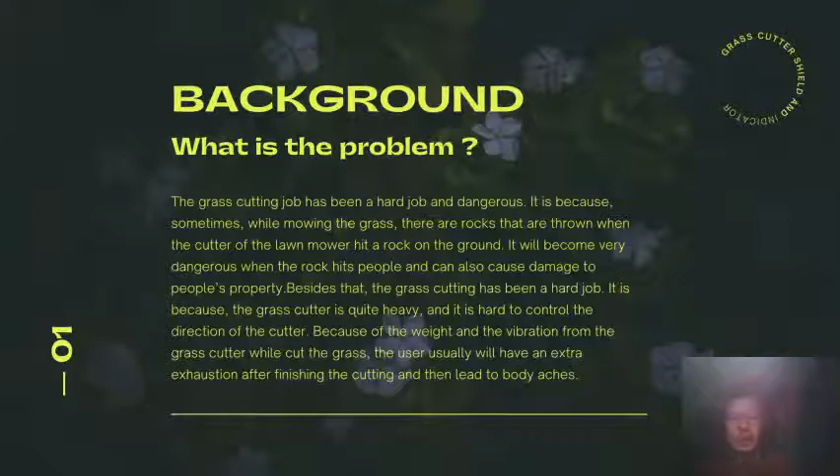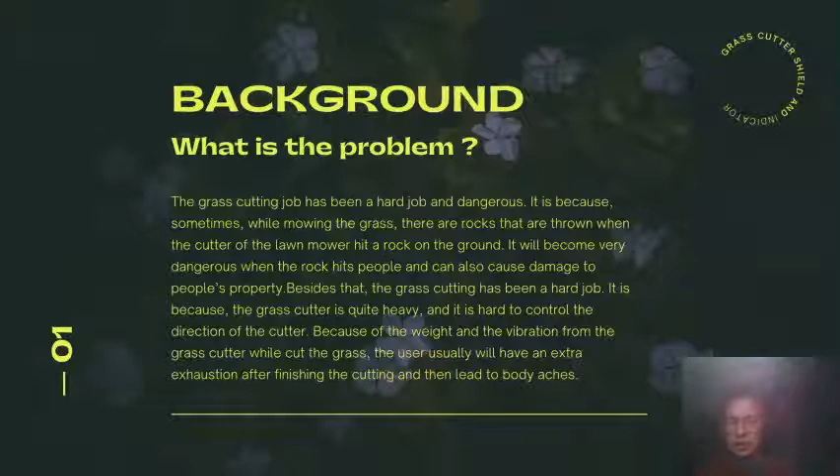Firstly, we want to talk about the background. What is the problem, and why did we create the Grass Cutter Shield? The grass cutter job has been a hard and very dangerous job. Sometimes while mowing grass, rocks are thrown when the cutter of the lawnmower hits a rock on the ground, hitting a person. This becomes very dangerous when the rock hits people and can also cause damage to property such as windows or cars.

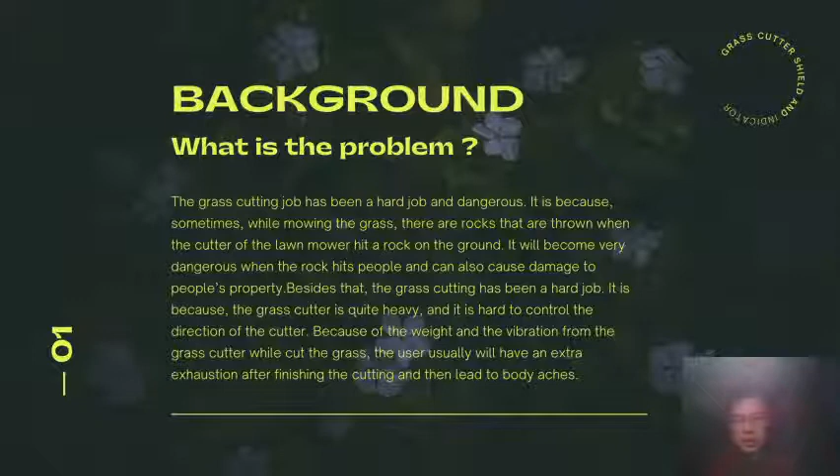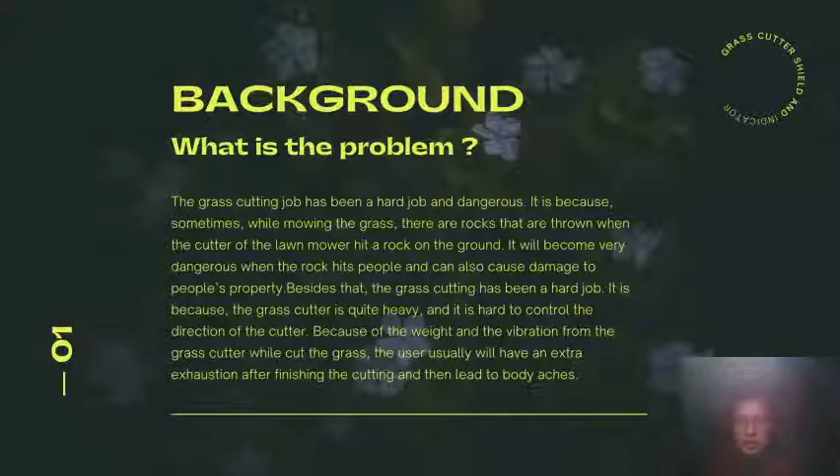Besides that, grass cutting has been a hard job for old people. It is because the grass cutter is quite heavy and it is hard to control the direction of the cutter because of the weight and vibration while cutting the grass. The user usually has extra exhaustion after finishing cutting, leading to body aches.

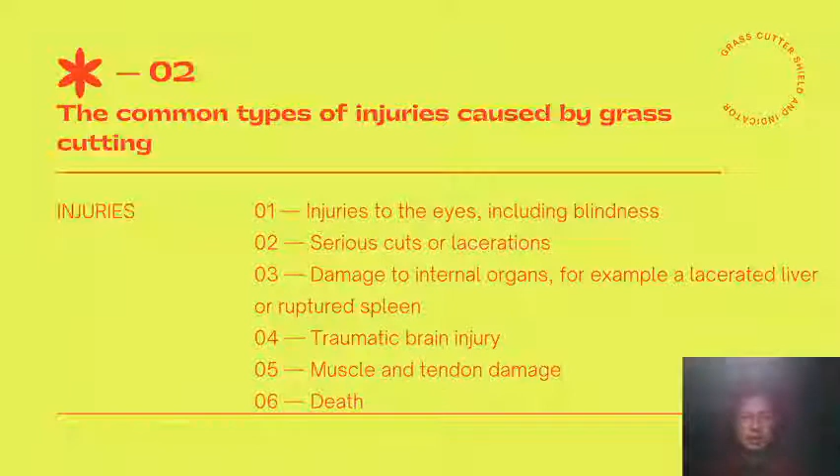Next, what are the common types of injuries caused by grass cutting? People who use the grass cutter often get injuries such as to the eyes, including blindness, and serious cuts and lacerations caused by rocks. There's also damage to internal organs, for example lacerated liver or ruptured spleen, traumatic brain injury, muscle and tendon damage, and lastly it may even cause death.

I created a product called a shield that is used to protect and avoid any chips or rocks that are thrown during the grass cutting process. Meanwhile, the indicator has a wheel and functions as a guide for new users such as youngsters or older people, so anyone can use the grass cutter easily, even with no experience at all. By this invention, anyone can use the grass cutter in safer and easier conditions.

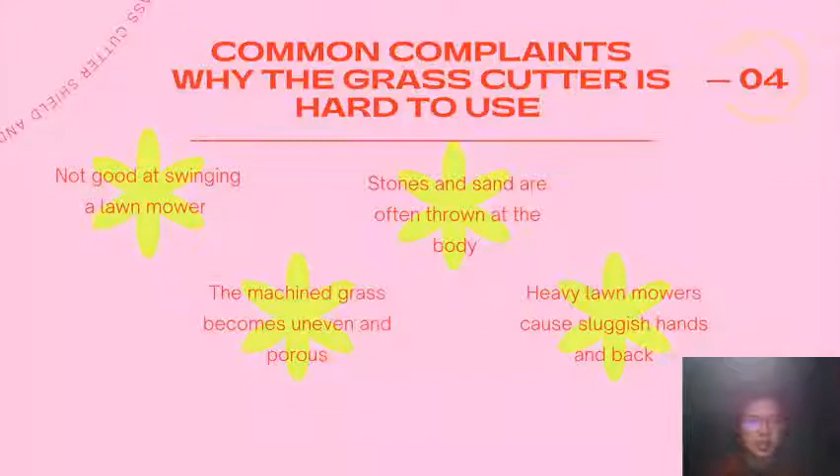The common complaint about why the grass cutter is hard to use - we conducted a survey with a number of people. Their most common complaint is that they are not good at swinging a lawnmower, which is why they avoid using it. The mowed grass becomes uneven and patchy, stones and sand are often thrown at the body, and heavy lawnmowers cause sluggish hands and back pain. This was the most common problem we found.

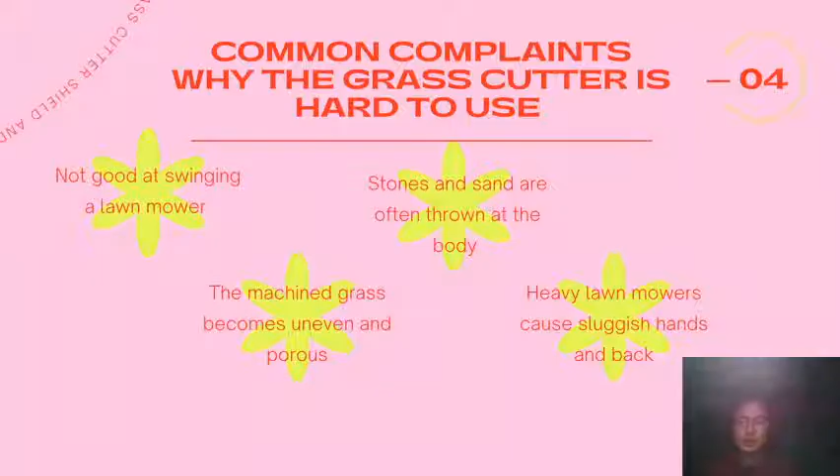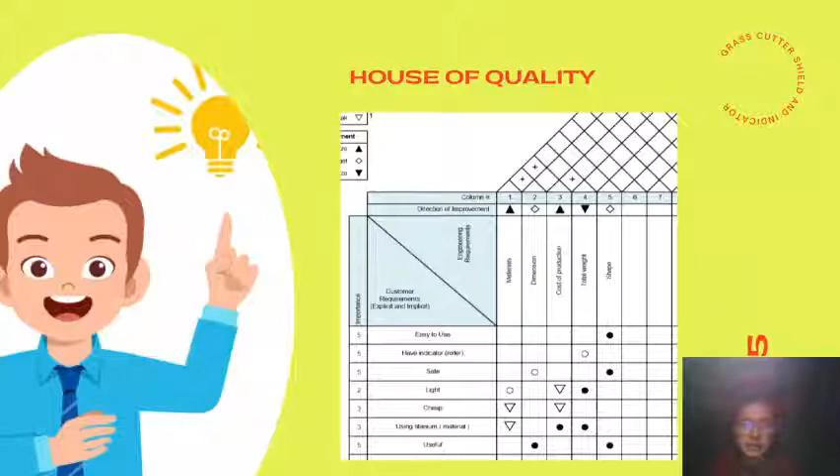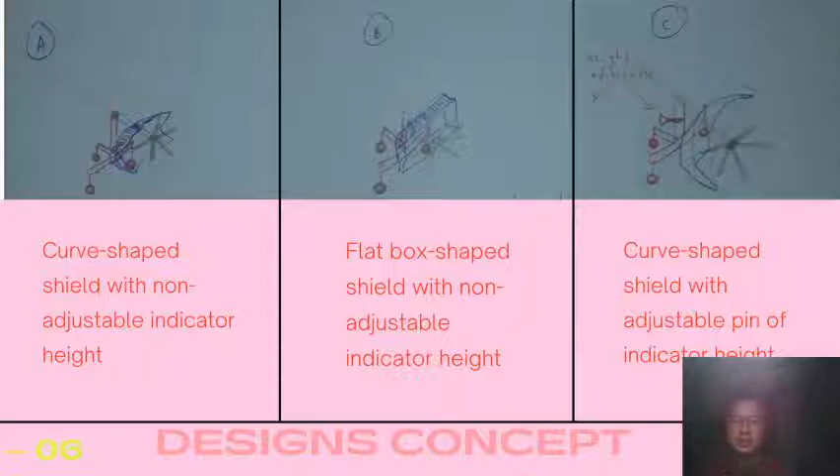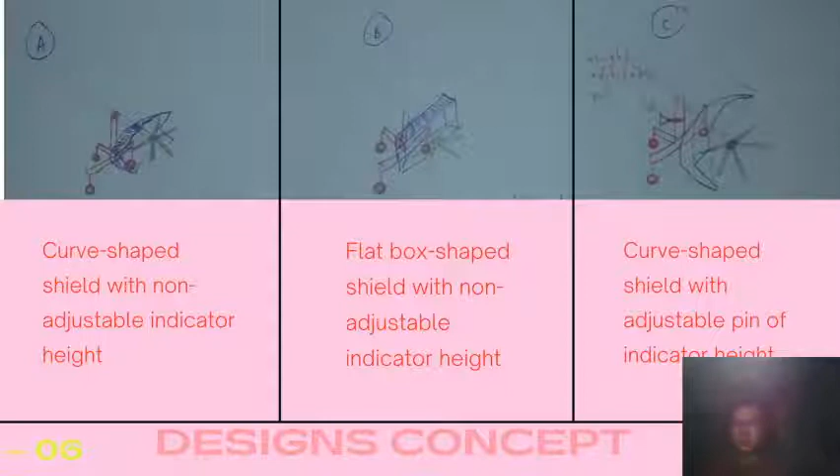Next, the design concept. Before creating the product, we created three designs for the shield. Firstly, a curved shape shield with a non-adjustable indicator height. Next, a flat box shape shield with a non-adjustable indicator height. Lastly, a curved shape shield with an adjustable pin for indicator height. Among these three, I chose design C because it is easy to use, and the curve shape can protect against rocks and sand flying during the grass cutting operation.

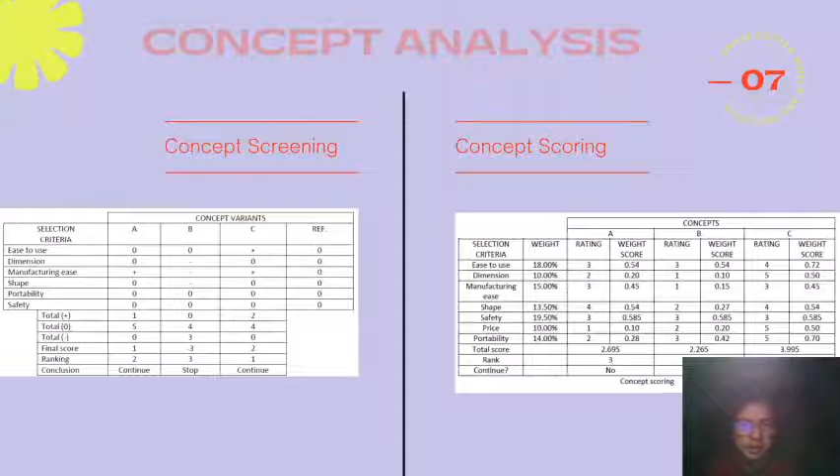Next, we did some concept analysis, separated into concept screening and concept scoring. Through this concept analysis, we could determine which design had the higher score, allowing us to proceed to the next steps.

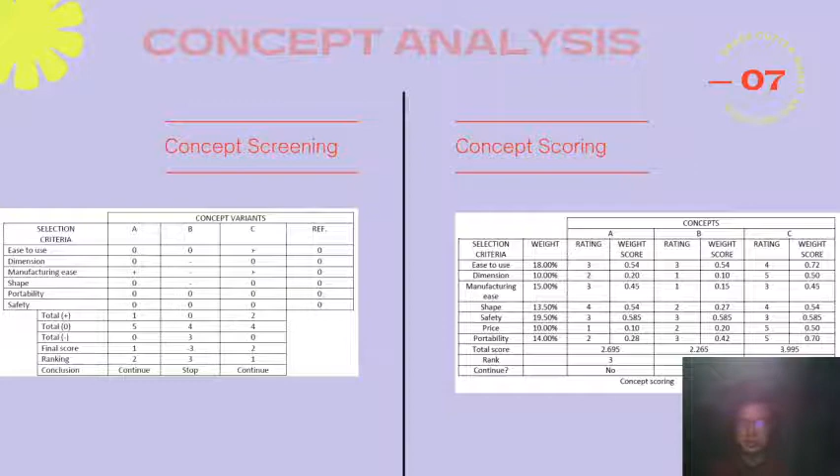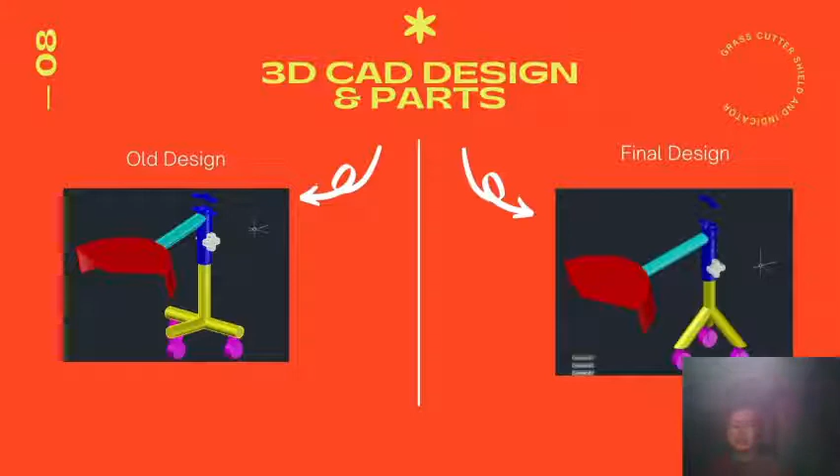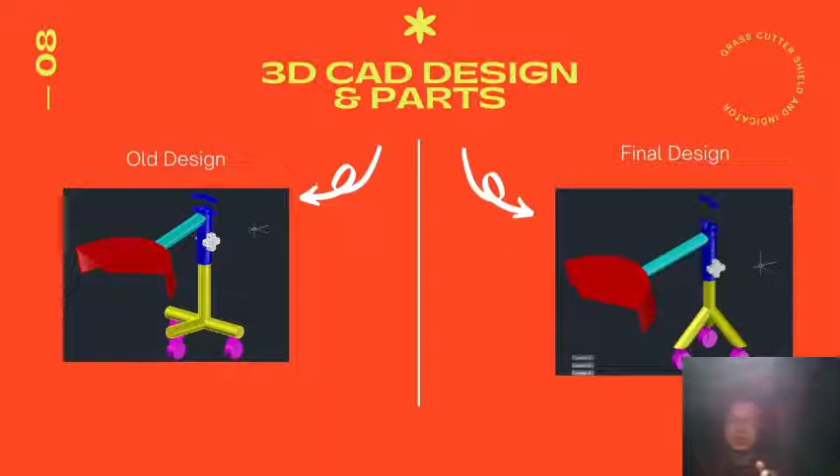Next, the 3D CAD design of the product we created. The left one is the old design. We can see the difference is in the body frame and the wheel. The old design has more straight T-shaped legs, while the final design looks like a pyramid shape. The final design is more economical and it can be used on uneven surfaces.

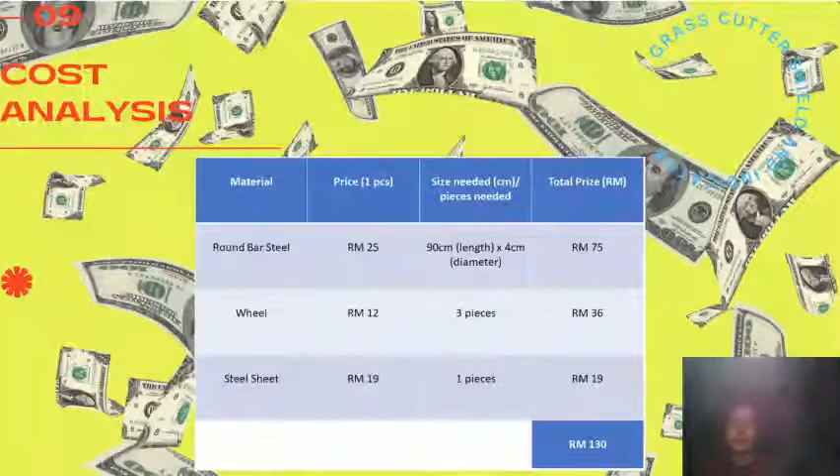Now, the cost analysis of this product. We discussed that we need 130 ringgit to create the product, using materials such as bar steel, wheel, and steel sheet.

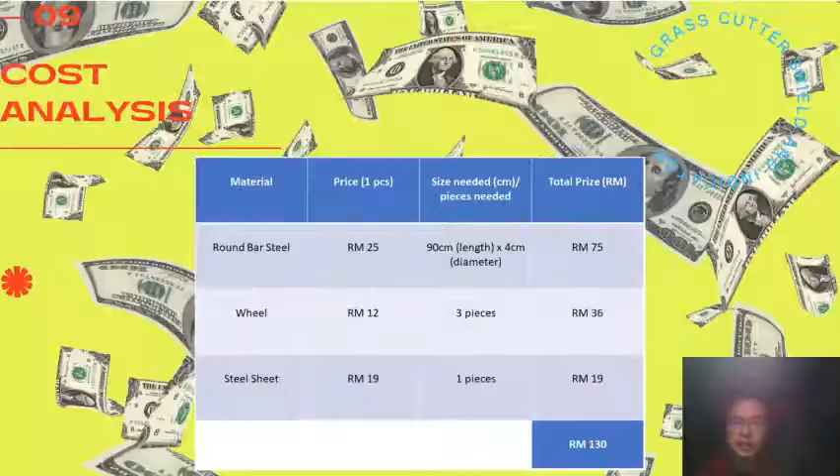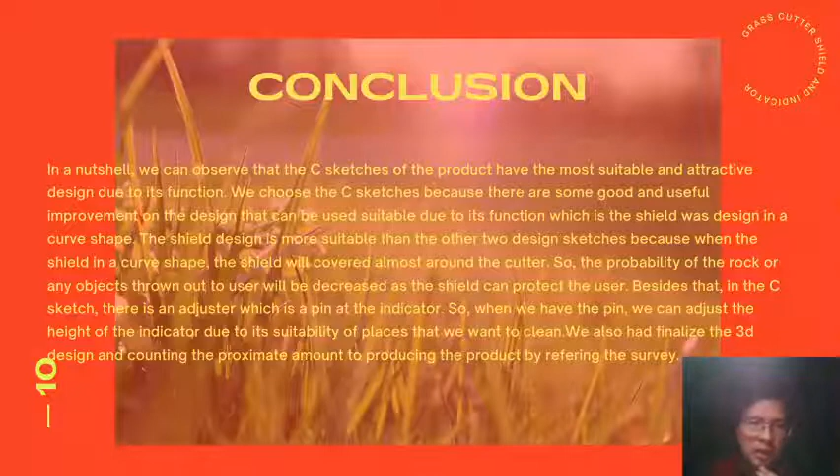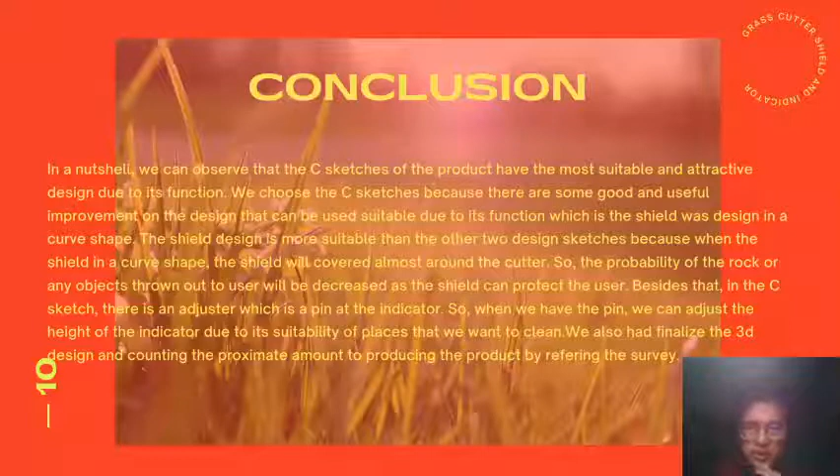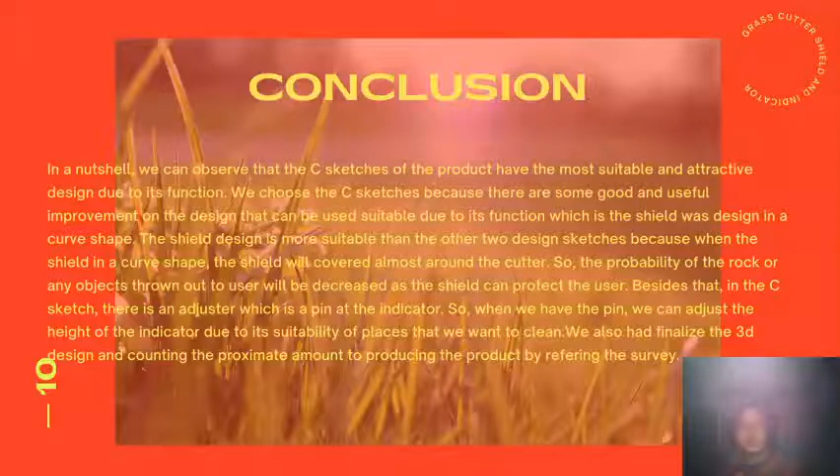For the conclusion, you can observe that the C sketch of the product has the most suitable and attractive design due to its function. We chose the C sketch because there are good and useful design improvements suitable for its function, which is that the shield was designed in a curve shape. This design is more suitable than the other two sketches because when the shield is curved, it covers almost around the cutter, so the probability of rocks or objects being thrown at the user is decreased, as the shield protects the user.

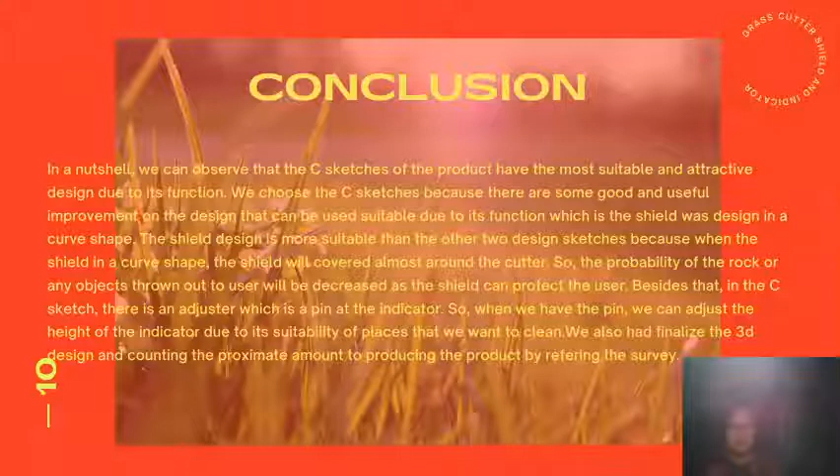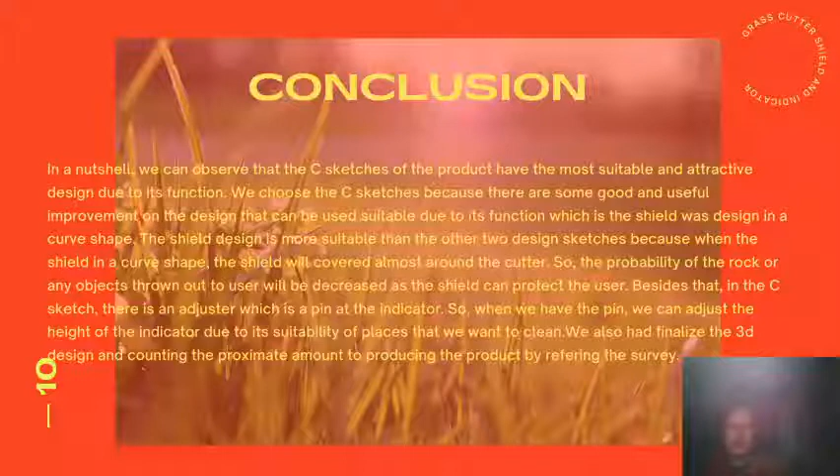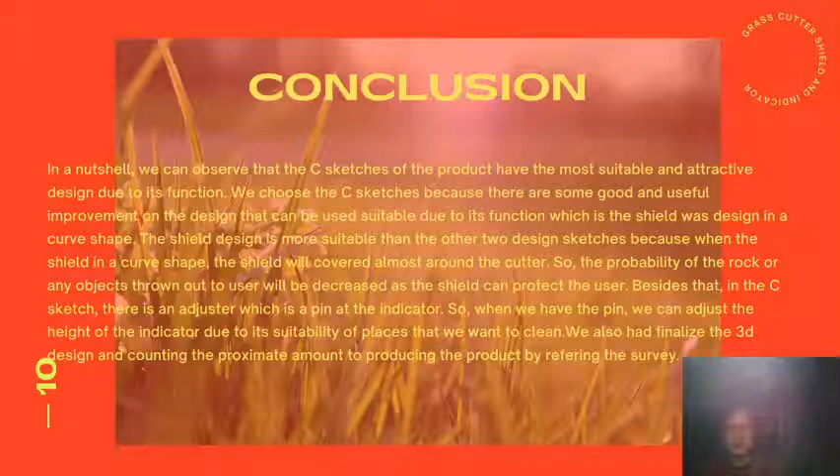Besides that, in the C sketch there is an adjuster, a pin at the indicator, so we can adjust the height of the indicator according to the suitability of the place we want to clean. We also finalized the 3D design and estimated the approximate cost to produce the product by referring to the survey. That's all, thank you.